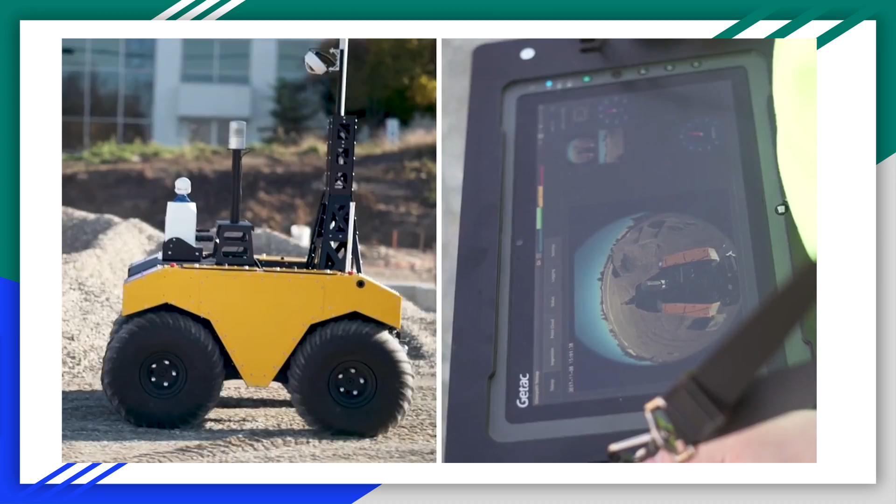A teleoperated mobile robot. In layman's terms, a remote-controlled robot which can drive around. Very useful, send it somewhere dangerous or hard to reach for a person, like minefield, ocean depths, or Mars.

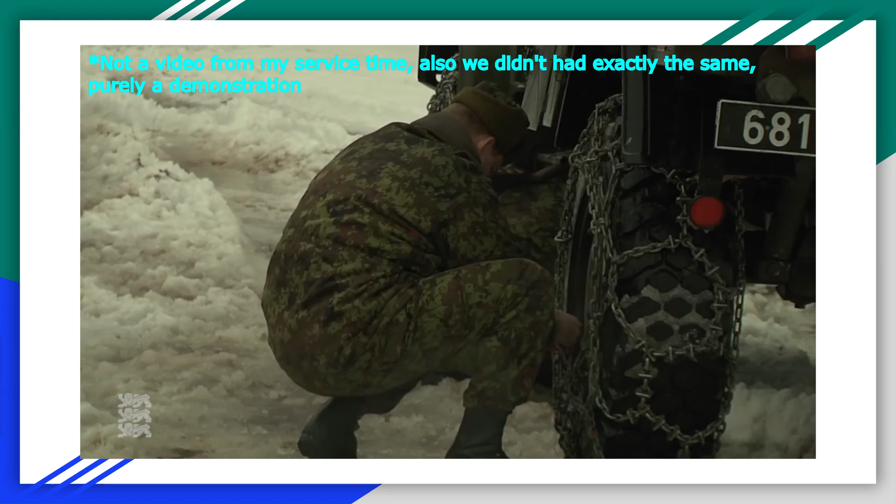Another thing which caught my attention and led to choosing this paper was the topic of slippage of a wheeled vehicle. During my conscription I had a fair share of practice in off-roading. I also personally experienced how our truck slipped sideways into a pit, so I was interested in how the paper addresses the issue. Now let's look at the problem definition.

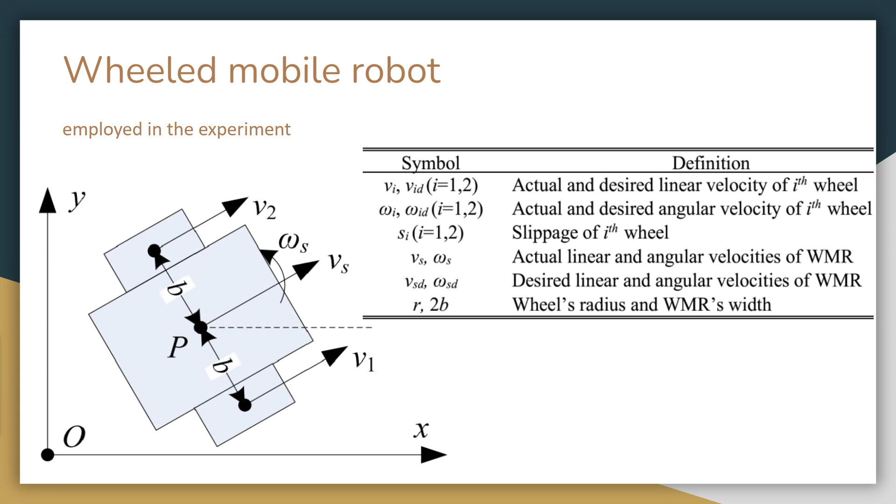Suppose we want to tell a robot to move with certain linear and angular velocities, but due to reasons the robot actually moves differently. This is why we have two sets of desired and actual velocities. Moreover, each of the two robot's wheels possess their own similar sets. With this, we can model the slippage to be a difference between the expected linear velocity achieved by a wheel's rotation with the real case.

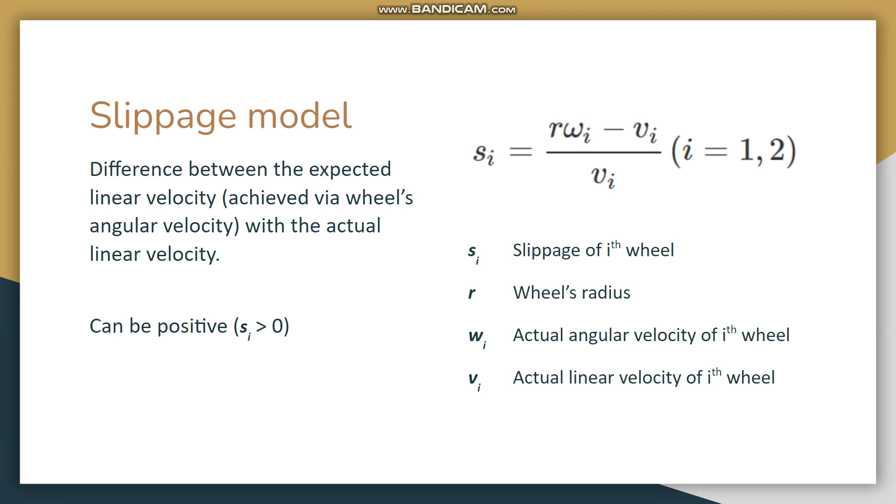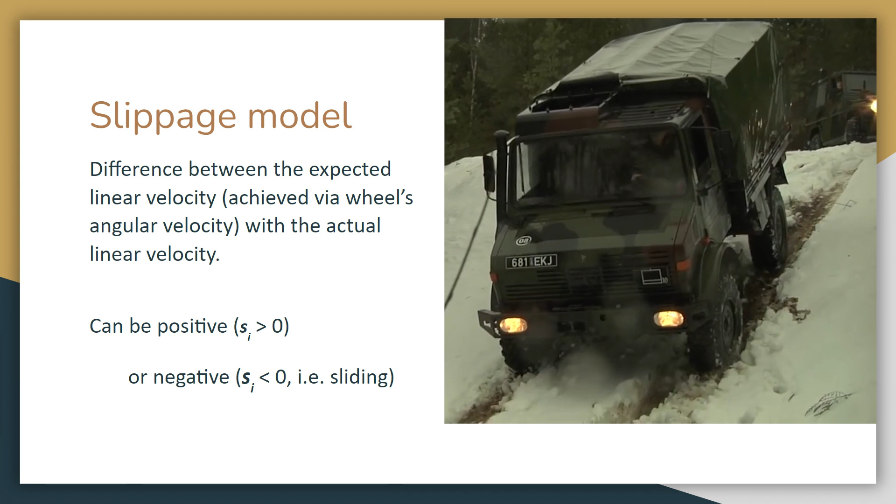By our definition, the slippage can be positive, meaning the actual linear velocity of a wheel is smaller than it should be. Or it can be negative, when the wheel slides and has its expected linear velocity exceeded by the actual one.

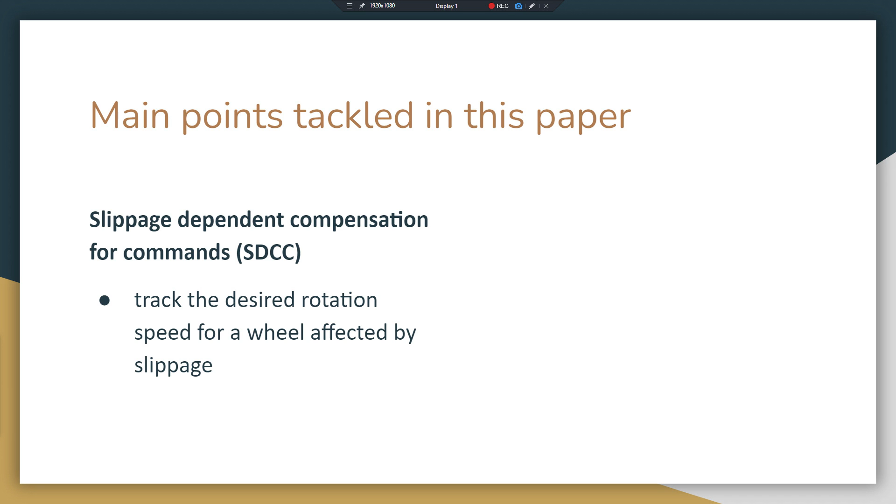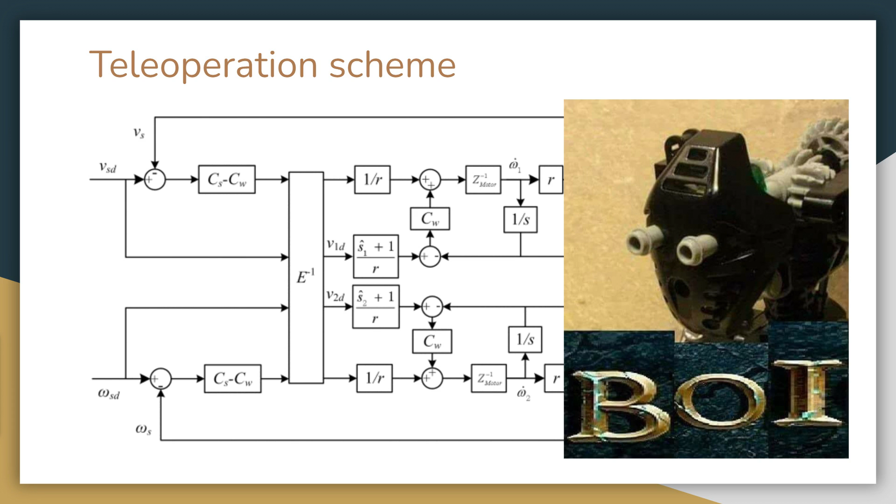By the authors' words, the paper tackles two topics in the solution. These are slippage-dependent compensation for commands, located in tracking the desired rotation speed for a wheel affected by slippage, and a position error-based controller which tracks commands from an operator. A scheme depicting the teleoperation process is shown to you now. Looks daunting, doesn't it? It would take a lot of time digging in this as well as previous publications to comprehend it, therefore I'll simplify the logic of it.

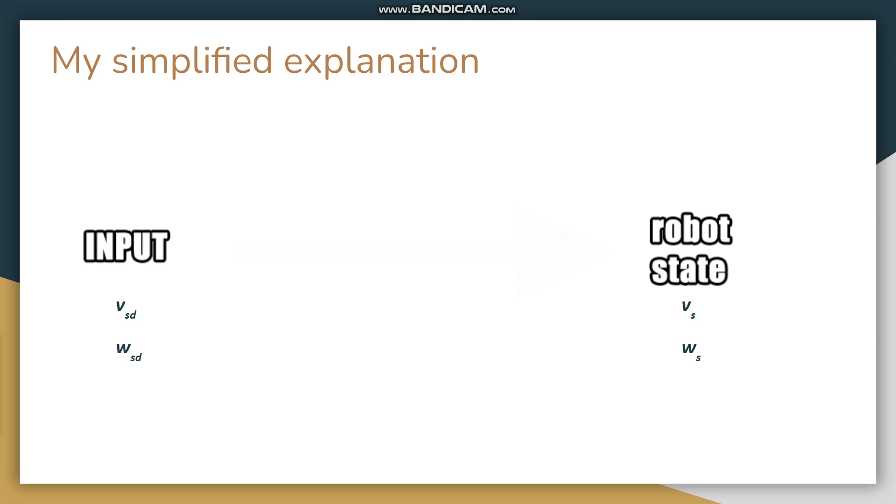Suppose we want to make the robot move a certain way. In perfect conditions we simply send our desire to the robot and its state changes accordingly. But in reality, wheels interact with terrain, therefore introducing deviations into the robot's state. In order to bring the actual state closer to the desired one, the system estimates slippage based on the previous input and robot states. Taking the estimation into account, we can augment our input to compensate out the deviations, or at least the majority of them.

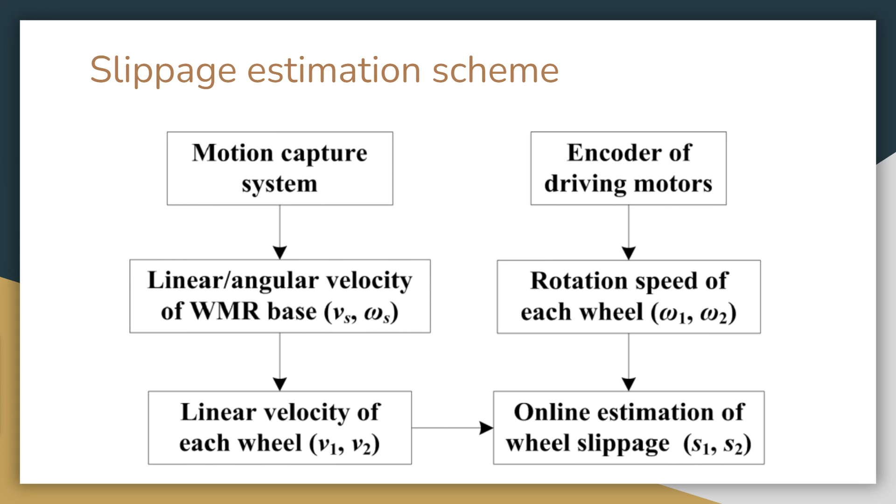The slippage estimation is achieved by processing linear velocity and rotation speed of each wheel. Linear velocity is derived using motion capture of the robot's body, whereas the rotation speed is received through reading driving motors' encoders. Now let's move on to how the authors have tested their solution.

As a human-machine communication interface, a Touch haptic device by 3D Systems Inc. was employed. The device allows a user to feel a touch of a virtual object by, as worded on the device's webpage, applying force feedback on the user's hand. The research team, however, have thought to use the device slightly differently.

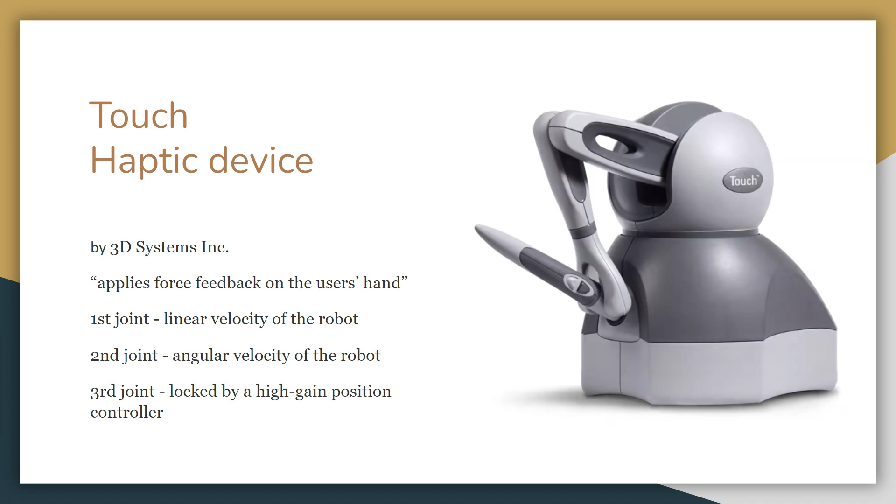For the first joint, a user can control the linear velocity of the robot. Through the second, the angular velocity. And the third joint was locked in place by a high-gain position controller, making it practically unmovable, since the robot has only 2 degrees of freedom.

And here's the whole experimental setup. A robot is rolling on a flat soft surface, while a person is trying to control it over LAN. A Touch device with its controller reads the human intent to move the joints, along with the incoming robot's velocity state. With this info, a proper response is generated and forwarded to both the person and the robot, allowing an operator to have a feel of robot-terrain interactions as well as communicating the operator's intentions for movement.

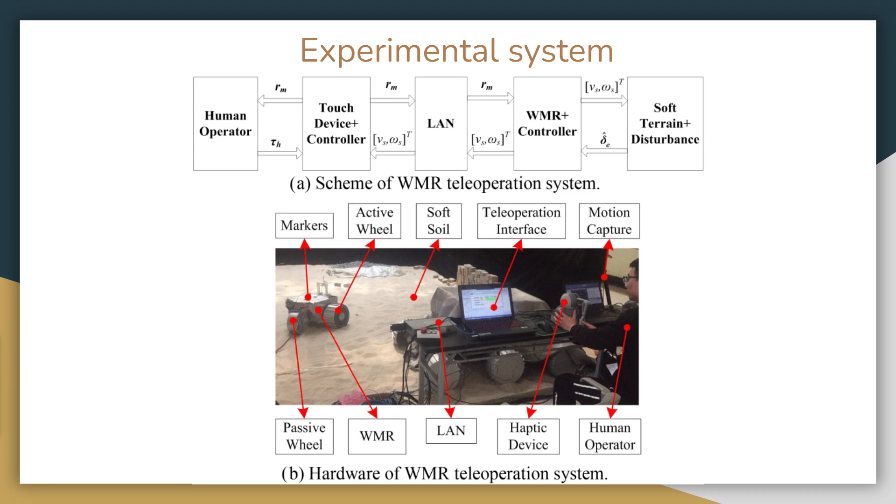To summarize my thoughts, the paper deals with only a fraction of the whole picture. It tests only a specific scenario, as we've just seen, a flat surface. It's but the beginning. Also, the authors confess themselves that the system is still unstable when encountering the sliding events. Nonetheless, they are quite satisfied with the current performance.

As I usually say, an unfinished project gives opportunities for further development. And the progress thus far, all in all, is still worth the merit.